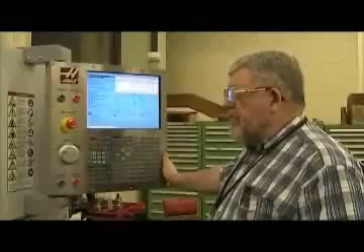Now that we have the tool length qualified, we can go ahead and set axis positions using an edge finder to accurately locate the workpiece. One thing I'd stress is that the order you do this in isn't particularly important. Oftentimes we'll set the X and Y zero axis positions prior to qualifying the tools. However, it's possible to qualify the tool lengths first if you have all the tools in the machine.

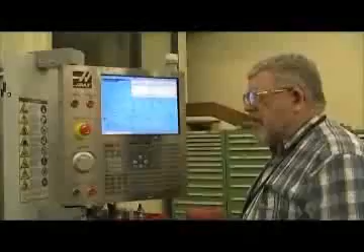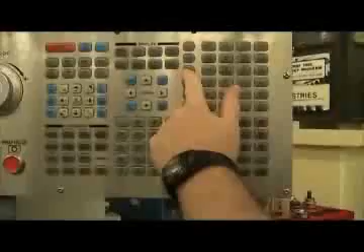Now, in order to get the empty edge finder in, I notice it's in pocket number 5 in the machine tool. So we're going to go to our MDI mode, select MDI DNC. Over here I notice it's got T1M6, the command for loading this particular tool in the spindle that's in there right now. I'm going to press T5.

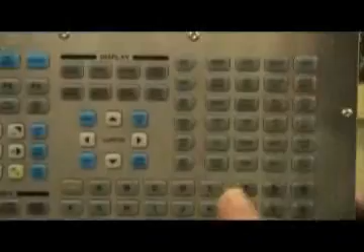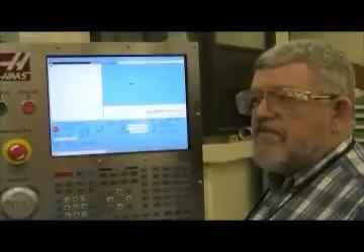One thing unique about the HAAS machine, different from Fanuc controlled machines or most other CNCs out there, is that in MDI mode on most machine tools, once the command is executed, it clears off the CRT and out of machine memory as if it never existed. This particular machine continues to carry the command line in memory and displayed on the CRT.

I have an input down here of T5. Just like editing a regular program, if I press the Alter key, it will change the T word in the command line being displayed to the T5 that I need to get in the spindle at this point. Once that's done, we simply close the door and press cycle start.

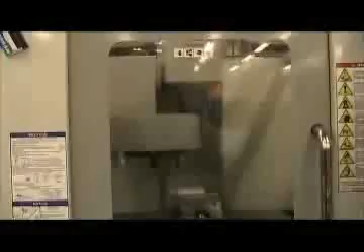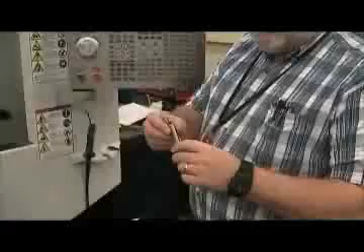Now that I have my empty Jacobs chuck in the collet, I will go ahead and install the edge finder in the chuck. This is a 200 thousandths diameter edge finder, so the distance from the center line of the edge finder out is going to be 100 thousandths of an inch.

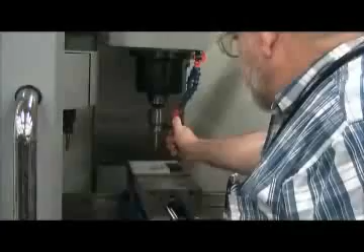I'll use the Jacobs chuck key to secure that so it doesn't slip. It does not have to be overly tight, you just want it secure enough that it's not going to slip while it's in the spindle.

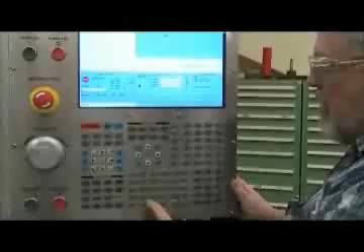The next step is to turn the spindle on. If I press the delete key while still in MDI mode, it's going to take away the commands that appear in the MDI line. Now I'm going to give it a command of S750 for spindle speed of 750 RPM and an M03 for spindle on clockwise. When I press the write enter button, that command appears on my MDI screen.

At this point, again, I close the door and cycle start. I now have my spindle running at 750 RPM.

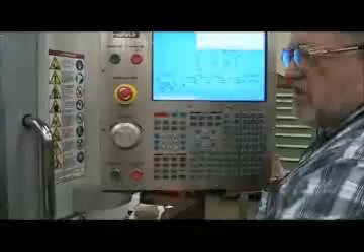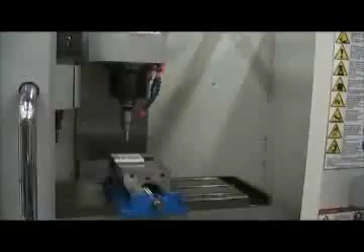I now switch to my hand jog mode, and with it in hand jog mode, I select the axis I want to move. In this case, if we're trying to set the X-axis at the edge of the part, I can press my X and move in a negative direction, and it moves the slide to the X position. Now I'm going to go ahead and come down to Z.

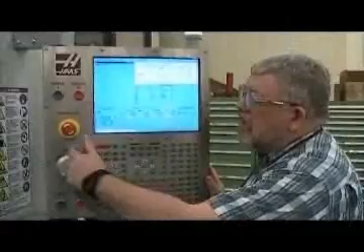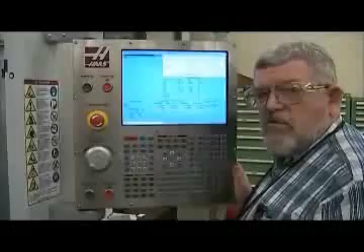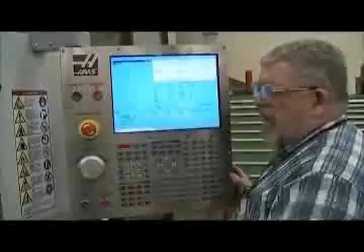One caution when you are moving: if you're in the 10 thousandths per increment setting on the dial and you start moving that handle really fast, you can over-travel, inputting more of a command for distance of move than the machine is actually able to keep up with. So when you stop turning the handle, if you do this really fast, there will be considerable travel that takes place before it satisfies all the command and move lines. You need to be real careful not to get too heavy on the hand wheel and come too close to the part before stopping. You may actually run into the part if you do that.

I'm now going to select my X-axis again and move in a positive direction. I get it up close, and I change my jog increment again to .001. I'm going to drop down just a little bit in Z, making sure I have good engagement against that machined surface. Now when I press my X-axis jog, I start coming in to touch the workpiece, and I look for proper alignment of the edge finder against the workpiece.

Now it just kicked off with that .001 moves. That's just about exactly where I want to be. At this point, I'm going to press the spindle stop button. That stops the spindle. I no longer need to have the spindle running with that tool just sitting there rubbing against the workpiece. Now, with the spindle off, I'm going to press the Z up button and jog Z up just to get it clear of the surface. Notice I have not moved in the x-axis.

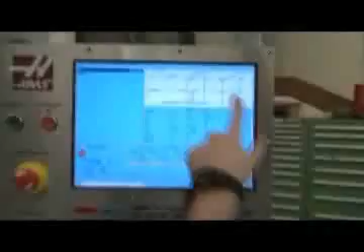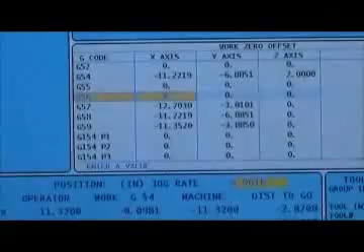I'm going to go back to my offset page, and instead of looking at tool offsets, what I want to look at is my workpiece offsets. So when I press offset again, I'm going to come down to, we'll pick for example a G56 coordinate offset.

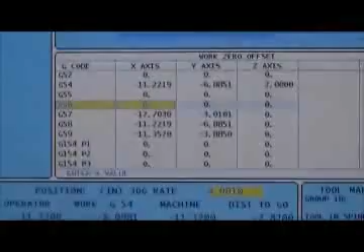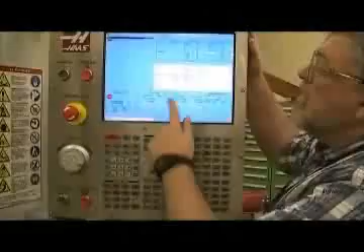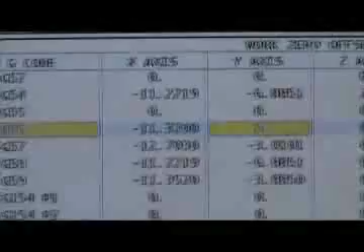It has the x-axis position highlighted. In order to find the x-axis position for this particular part, I'm going to press the Part Zero Set button. When I do that, the x-axis position is automatically loaded into the x-axis position for that G56 coordinate system. Now, one of the things that happens with this machine, and with any of the machines, is the actual center line of the spindle is 100 thousandths to the x negative position. So we would need to adjust this axis position by 100 thousandths in order to get it perfectly on the edge of the workpiece.

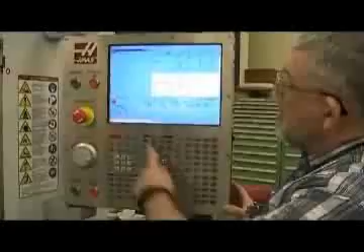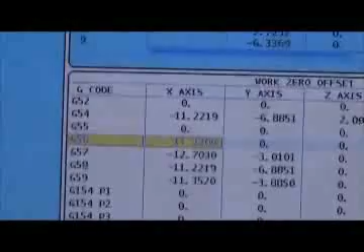The HAAS controller is kind of cool in the way that it does this, in that all I need to do is go in and press 0.100, which shows my input here, and when I press the write button, you'll notice that this is going to update the coordinate position to minus 11.220 from the minus 11.320 that was there a minute ago. So what that does is it allows me to compensate for the thickness of my edge finder in a very simple manner, which is kind of nice.

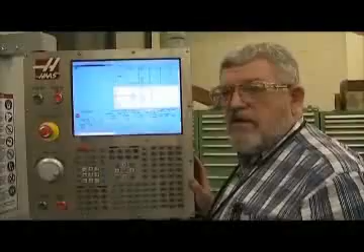You don't have to do the math yourself, the machine will actually do the math for you. What is required is you do need to think about which side and where you have to move as to whether it's a positive or negative value that you put in for the edge finder compensation.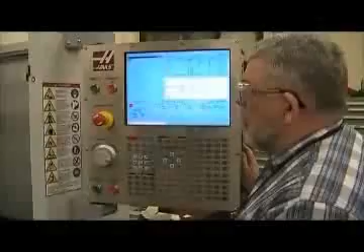In order to set the y-axis position for this coordinate system, what I would do is turn my spindle back on. My edge finder is running out. I go back, I'm going to switch my increment to 10 thousandths. I'm going to go X. I'm on the Z, so I'm going to go to my X axis. I'm going to come over. I'm going to go to my Y axis. I'll move the Y axis down here. I'm going to bring my Z down.

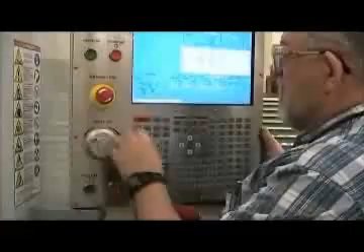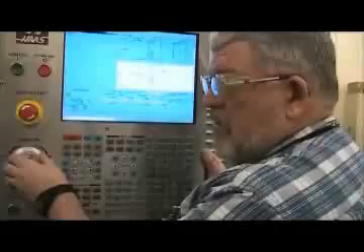I'm going to slow my increment. Now I'm going to go back to my Y. As I start getting closer to the workpiece, I notice I've got to bring Z down just a little bit more. So we come down in Z. Now we go back to Y, and I'm going to move Y positive. Again, I look for it to come in to the point where it starts getting the edge finder running very close to being perfectly up and down.

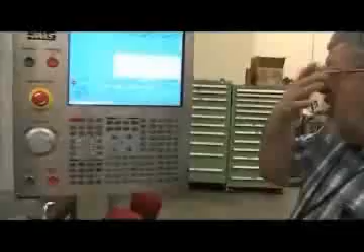We went in 1,000th increments right to the point where it kicked off. I'll stop the edge finder. Now I make sure that I move my cursor over to the Y-axis position. Again, I press my part 0 set. It automatically loads the position in there for the center line of the spindle.

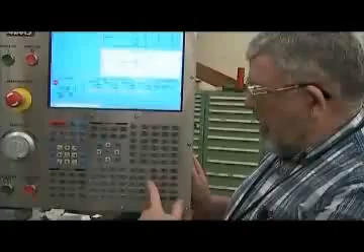Now I'm going to move my Z up just to get it clear of my workpiece. And I think about this, I actually need to be Y plus 0.100 thousandths to have the center line of the spindle exactly over the edge of the part. Again, because I've got to go in the Y plus direction, I go 0.100 and hit enter, and it updates my axis position by 100 thousandths.

So now, if I go to the G56 coordinate position at X0, Y0, we'll do that. We're going to show you how to verify. I'll just move my axis up. I'm going to go back to my MDI mode. We'll clear those words out.

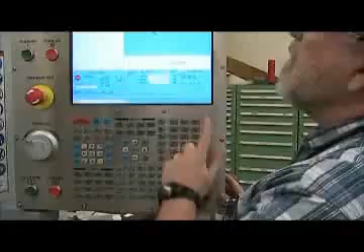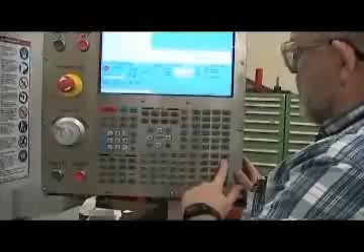Now we're going to do a G00 for rapid, G90 for absolute mode, G56 for the coordinate system we just set, X0, Y0. Input, I make sure everything's up there. I've got G0, G90, G56, X0, Y0. Close the door and cycle start.

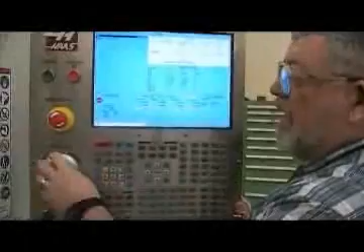Now if I want to verify that, I go back to my hand jog mode, select my Z axis, and I bring my edge finder down, and if I look at that, the edge finder, if it was running perfectly true, would be right over that corner of the workpiece so that it would be set exactly where I want it set.